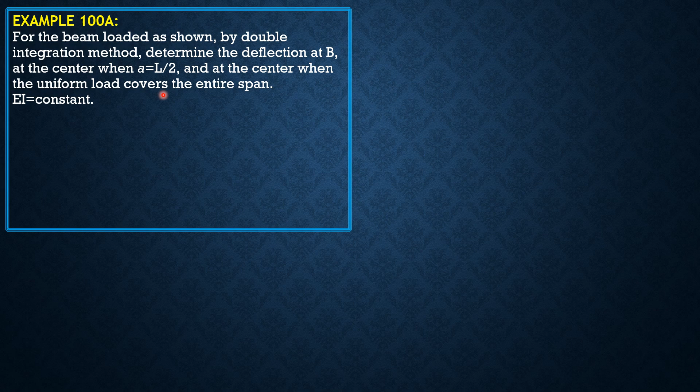For the next example, for the beam loaded as shown, by double integration method, determine the deflection at B, at the center when a is L over 2, and at the center when the uniform load covers the entire span. EI is constant.

So this is the situation, and we use this situation to derive the mid-span deflection when the load covers the entire span. And I think you're familiar with it if you're already through. But if it is your first time, you do not know yet the maximum deflection. And that's common when the entire simply supported beam is covered with uniformly distributed load.

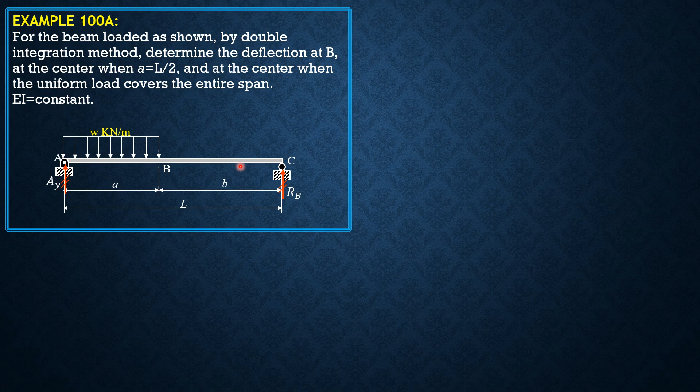So first, let's solve for the reactions, Ay and RB. We'll just solve Ay. So summation moment at C equals 0 equals Ay times L minus wa times quantity a over 2 plus b. So Ay equals wa over L, quantity a plus 2b over 2, or wa over 2L, quantity a plus 2b by simplification.

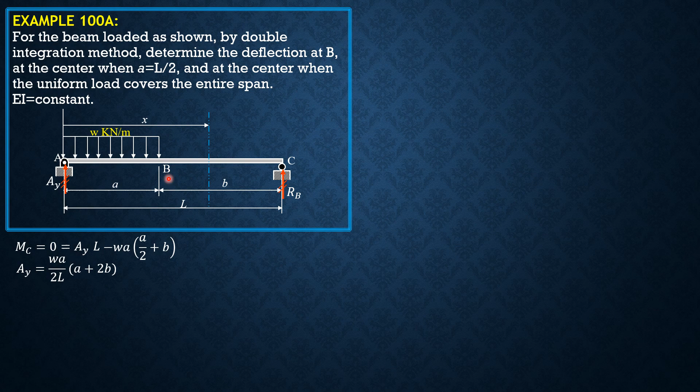So we have a sectioning here to set up the moment equation. Let's call that x. So that the moment equation is continued up to this section here, we have to extend the loading and counter it by an upward equal loading. So therefore, the moment of this section is from Ay.

So EIy double prime equals wa over 2L, quantity a plus 2b times x, plus the moment of this loading, which is w times the length x minus a, and the moment arm is x minus a over 2. So w over 2 times x minus a squared, then minus w over 2 x squared. So simplifying, EIy double prime equals wa over 2L, quantity a plus 2b times x, plus w over 2 x minus a squared minus w over 2 x squared.

Integrating once, EIy prime equals wa over 2L, quantity a plus 2b, x squared over 2, so it becomes wa over 4L, plus w over 6 x minus a cubed minus w over 6 x cubed plus C1.

Then integrate further, x cubed over 3, so this becomes wa over 12L, quantity a plus 2b, x cubed plus w over 24 x minus a to the fourth minus w over 24 x to the fourth plus C1 x. Again, there's no C2 because when x is 0, the deflection at A is 0. C2 divided by EI is the deflection at A, while C1 over EI is the slope at A. Remember that.

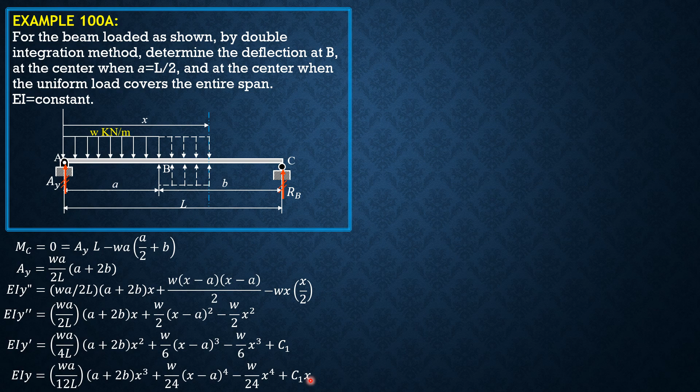So when x is L, y is 0. So 0 equals wa over 12L, quantity a plus 2b, L cubed plus w over 24 L minus a to the fourth minus w over 24 L to the fourth plus C1 times L. So solving for C1, we transpose, the negative becomes positive, divided by L. So this becomes wL cubed over 24.

Then minus wa over 12, quantity a plus 2b L, because L cubed over L is just L squared... then this one divided by L, w over 24L. Then take note that L minus a is b, so that's why I replace it with b to the fourth. So that's the value of C1. There's no need to simplify because we cannot combine like terms anymore.

So C1 is w over 24 L cubed minus wa squared L over 12 minus wabL over 6, and minus wb to the fourth over 24L. So that is C1. So C1 is w over 24L, quantity L to the fourth minus 2a squared L squared minus 4ab L squared minus b to the fourth.

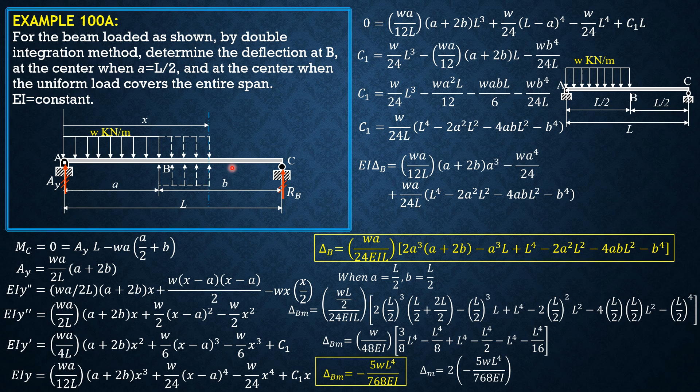and that's the maximum deflection at midspan when the beam is loaded entirely with uniform load. So it is negative 5wL to the fourth over 384 EI for that situation. And I hope that you're familiar with this situation. So that's it for this problem.